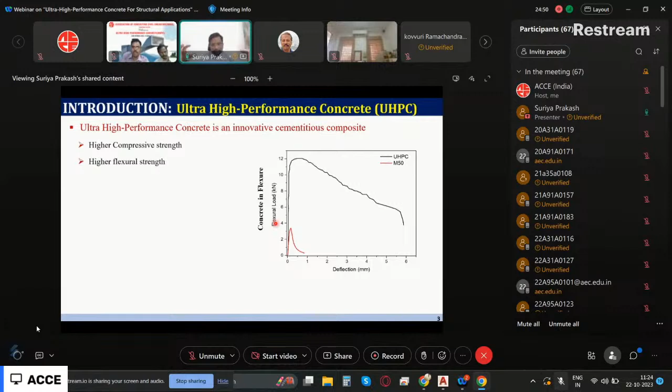Now this is very, very important. This is in flexure. So I take a small concrete prism and then I subject it to 4-point load. If I plot this load versus deflection curve, here again I have two curves. One is the red color one, another one is the black color. The black is the UHPC and red color is the M50. So you see here M50, at even a load of about 3.5 or so, is cracking and failing suddenly. But if you look at UHPC, just as a typical example, this also I can increase. This is in load, not in megapascal. So 3.5 has become almost 12. So it can take very high flexural loads.

And also when it is failing, you can see that suddenly the capacity is dropping in this M50. But here the capacity is dropping very, very slowly, very gradually it is decreasing. So that means this material can sustain high strength in flexure, bending. Also, right after cracking, it will not fail. It will give away its capacity very slowly. That's what we want as a structural element. Soon after it develops a crack, we don't want failure. It should give sufficient warning before we can look at some intervening techniques. Okay, so this is a big advantage.

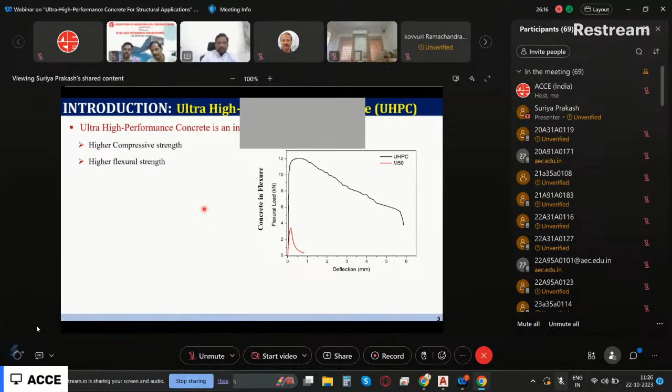And the tensile ductility is greater than 3%. So what is the meaning of tensile ductility? When I test the same material in tension, you know that concrete is very poor in tension. And usually tensile strength is about 10% of the compressive strength. In fact, it varies from 5 to 10%, depending upon what concrete you're looking at. But ductility is the ability of the material to resist the load even after cracking or yielding. For concrete, it is cracking. So even after cracking, it can sustain the load up to 3% of strain. Okay, that's a very high capacity for concrete.

But usually concrete is going to fail at a strain of about 0.0001. Okay, if you multiply in percentage, it is going to be 0.01. So you can see here it is increasing multiple times. Then because I'm having higher compressive strength, higher tensile strength.

Now if I'm comparing a bridge girder like a box section that we have seen here, if I do conventional concrete, these are the dimensions. If I do UHPC, these are the dimensions. People have studied that. Okay, that's the reason a lot of bridges are now being built in India with UHPC. In fact, the Government of India is also pushing this new material to be adopted. You can see the area of concrete. Area reduces by about 50% or so.

The overall depth reduces, so there is a significant weight reduction. The moment I reduce the self weight, when you go for longer spans, if I'm able to reduce the self weight, my demand comes down again. Concrete's major problem is we put a lot of material, and the self weight itself, the dead load, is quite heavy. That's one of the problems with concrete construction compared to steel. Steel is very attractive because it's lightweight. By using this kind of material, we can get into the realm of steel, you can make very light sections. That is a big advantage.

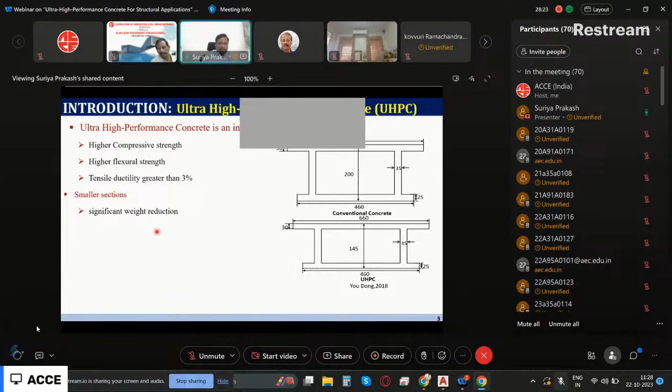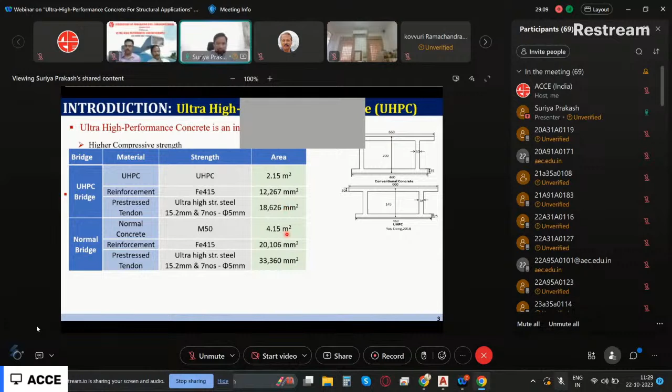This is an example for a bridge superstructure element like a box girder segment. If I'm using UHPC and a normal bridge with M50 concrete, I need a cross-section area of about 4.15 meters square. Here, it's 2.15 meters square, so roughly 50% reduction. Similarly, for the amount of steel, prestressed tendon and reinforcement, you get roughly 30,000 mm square of steel here, but for a normal bridge you end up with almost 50,000. So there's a tremendous reduction in amount of steel too. I use less material and less steel, that's a big advantage.

Most of you must have seen Hyderabad Metro, right? If you look at it in the city area, usually these bridge piers are spaced at about 25 to 30 meters. Metro runs for multiple phases now, and each phase can be 40 kilometers. So in each 40 kilometers, if every span is roughly 30 meters, look at the number of piers required.

Sir, excuse me, for a small observation, there is a gray box on your screen. It's some obstruction. Thank you. Is it okay now? Right, yeah.

If you look at the Hyderabad metro, the number of bridge piers required is one every 30 meters, and then you put the superstructure on it. So you end up putting a lot of material, and also imagine digging up for foundations. If somehow I can reduce the number of column spans and make the span from 30 meters to 60 meters, you're definitely cutting down the number of piers and foundations required, leading to faster construction, and you have a longer clear spacing so people can move across from one side to another very easily. These are all big advantages.

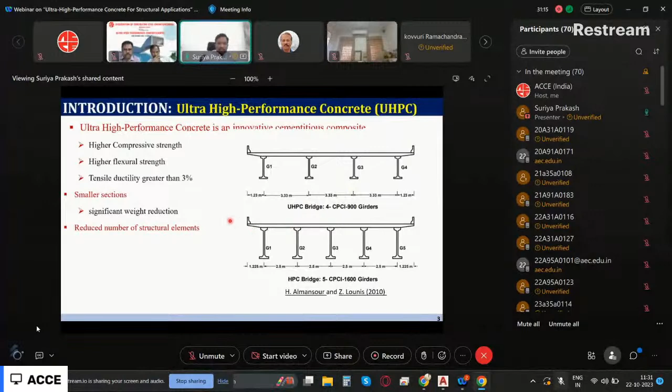Same for the superstructure: instead of high performance concrete, with normal concrete I need to put a spacing of 2.5 meters here, but with this material I can go for 3.3 meters. So even the number of girders required changes, in the normal case you see 5 girders are required and the depth is also high, but here I need only 4 girders for the same carriageway width. So I end up with fewer structural elements. That's what we talked about in the example of Hyderabad metro as well.

Now, another important thing is because we use very fine material, when cement reacts with water and the aggregates, you form hydration products, calcium silicate hydrates, which give strength to the concrete. In regular concrete, the weak link is what we call the interfacial transition zone, the interface between the aggregate and the cement paste. Because I'm using very fine material in this UHPC, this fine material can go into the aggregate and form a very homogeneous surface at the interface. So you get a very dense hydration product and a dense microstructure, and even porosity is going to be less and discontinuous. Durability is related to the porosity and the interconnectivity of the pores; if the pores are interconnected, water, oxygen, chloride, or any substance causing corrosion can flow from one side to another.

If I'm able to make this pore structure discontinuous, then I make the concrete very durable. So this is the advantage - it gives excellent protection against corrosion, excellent resistance to chloride penetration, and low water absorption. These are all the advantages.

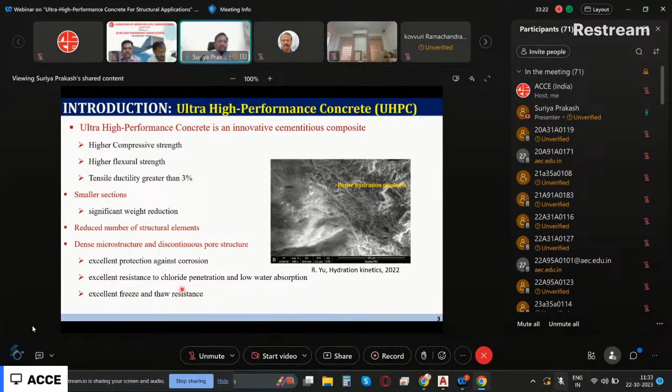It also gives excellent freeze and thaw resistance. Freeze and thaw is not a big issue in India, but in the Northeast, sometimes the temperature can go sub-zero degrees centigrade. If water gets inside and becomes ice, the volume increases, putting pressure on the surrounding concrete and causing a lot of cracking. Now, if water cannot enter, I don't need to worry too much about freeze and thaw resistance. So these are advantages.

Another example: it has high durability and mechanical strength comparable to steel. With steel, you end up with a lightweight structure and can go for a long span. Concrete has its own advantage too - you can make it into any shape you want, and it is highly durable. Fire resistance is a big advantage as well.

By making this material have high mechanical properties and addressing the shortcomings of regular concrete - since steel is prone to corrosion and has fire resistance issues - what we are saying is we take the advantages of steel while also retaining the advantages of concrete. In this way it becomes a fantastic technique for making structures.

If you look at the maximum span: using conventional concrete, I can go for 20 meters. Using steel, I can go up to 50 meters - just one example. With UHPC, you can go even longer because now I can also add pre-stress. So these are some of the advantages, and you can make very complex structural shapes.

That's why facade elements are now being made using UHPC. You can make a very thin, nice facade element that is always in contact with water and the external environment. So that is again a big advantage.

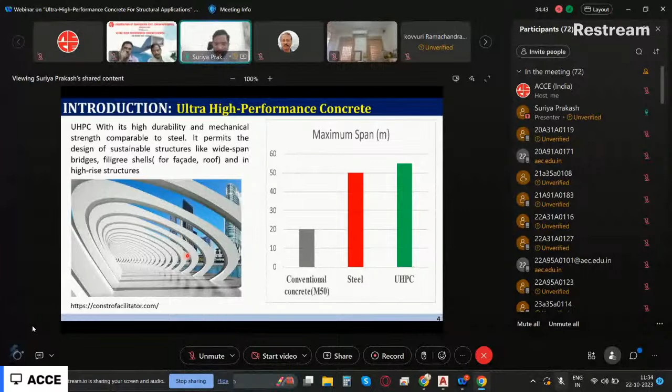Another important reason we are going for high strength concrete is we want to go taller and taller in the building sector, and also make bridges longer and longer. Suspension bridges - people are now talking about 1 kilometer, 1.5 kilometer, even 2 kilometer spans.

If you look at Chicago Water Tower, they used M100 concrete, constructed in 1990, with a height of more than 300 meters. In Hyderabad too, after Mumbai, India is going to have a lot more skyscrapers, with many projects already started in the range of 250 to 300 meters, especially in the financial district, Kokapet area, where a lot of players are putting up very tall buildings.

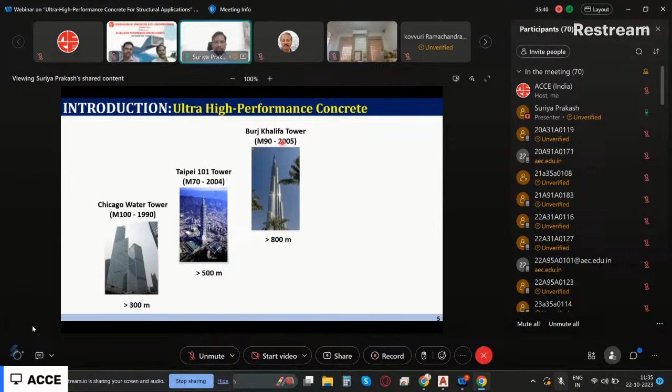Taipei 101 tower used M70 concrete. Burj Khalifa used M90. And now Jeddah Tower, also called the Kingdom Tower, where work was stalled and has now restarted, is aspiring to go more than 1 kilometer.

As the height of the building increases, you want to put a very stiff element - that's why the core is always made of concrete. With high performance concrete, I can use less area and still achieve what I want. This is the reason people are preferring more high strength concrete.

Now let's see historical classifications. For normal concrete, the strength is in the range of 25, 30, 40 megapascals, and water cement ratios are in the range of 0.4 to sometimes even 0.7 in the olden days, because chemical admixtures were not available then. The only way to get workable concrete was by increasing the water to binder ratio - binder being the common terminology for cementitious material.

Then high strength concrete was developed around 1985. People realized that the more water you put, the strength comes down, because you don't really need that much water for complete hydration. So they started looking at water-binder ratios in the range of 0.28 to 0.4.

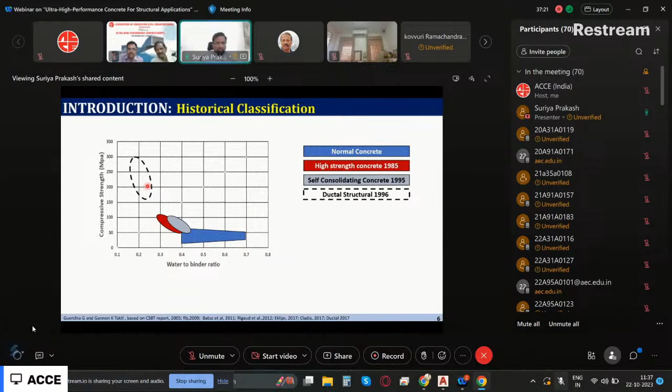And then self-consolidating concrete was developed in around the mid 1990s. And that is again water cement ratios in the range of 0.3 to 0.4. Now, Ductal is one of the first products in UHPC that was developed. They realized that you don't really need that much water to binder ratio, even with 0.18 you can get, and they were able to develop strength in the range of even 300 megapascal.

And then the ultra high strength concrete came into the picture at about 2000 or so. It was developed in France, and then very significantly used in Europe. Then the US also started adopting, I would say, about 20 years ago. And now every state highway department in the US is adopting this in bridge construction. There are also several buildings that are being made with this UHPC.

Now, Taktl is another product which was developed in 2010. That is in the range of 100 because this is mostly for architectural concrete. And then we have again architectural Ductal. One more product came in 2012. That also had a slightly higher water cement ratio because these elements are very thin and so on.

So what I'm trying to say here is if you want a high compressive strength value, you need to somehow limit your water to binder ratio. Okay. So if you want strength in the range of 150 to 200, your water to binder ratio cannot go more than 0.2. Okay. So that is the point I'm trying to make.

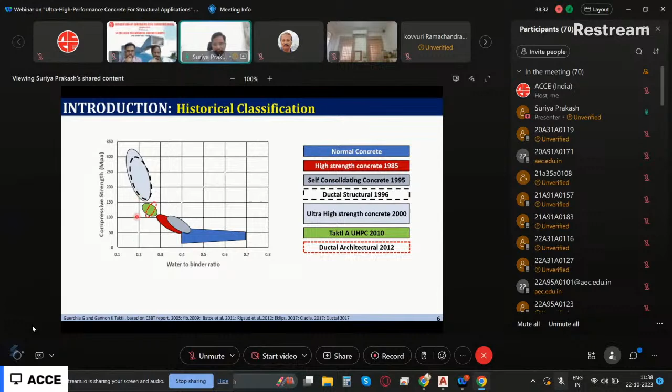Now, in terms of difference in concrete compositions, when you look at it, for normal concrete, the quality of raw material, if I'm plotting it in the y-axis, and in the x-axis I'm plotting different concrete, the quality of raw material for UHPC has to be very, very high. Okay. Even a small change in the quality of the raw materials matters. Even when you want to make good concrete, obviously the quality of your ingredients should be good. But UHPC is a very special concrete. If you want to achieve whatever we are aspiring for, then you have to select carefully, and the quality of raw material has to be really good. Okay, which we will talk about.

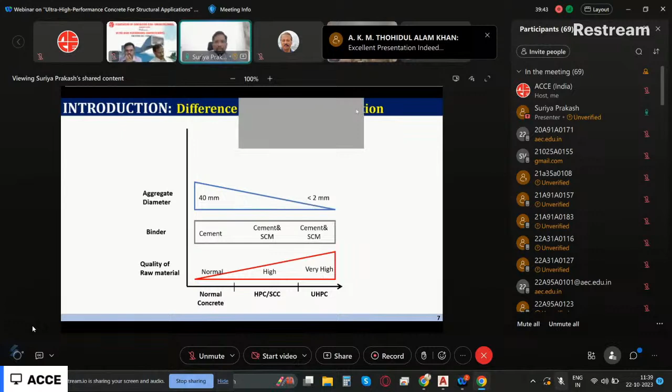And binder, when you talk about it, in normal concrete we use only cement as a binder. In high performance concrete and SCC, we use cement as well as supplementary cementitious materials as binder. In UHPC also, we do the same, cement and supplementary cementitious materials. And in the supplementary cementitious material, again, we have to limit the size of the material. And if you look at aggregate diameters, for normal concrete, usually about 40 mm, but sometimes with proper gradation, we can also go ahead and use low strength, large size aggregates. But in UHPC, the size of the aggregate has to be limited to less than 2 mm. Okay, so then only can I get better packing and good mechanical properties. So these are some of the challenges that we need to be careful of.

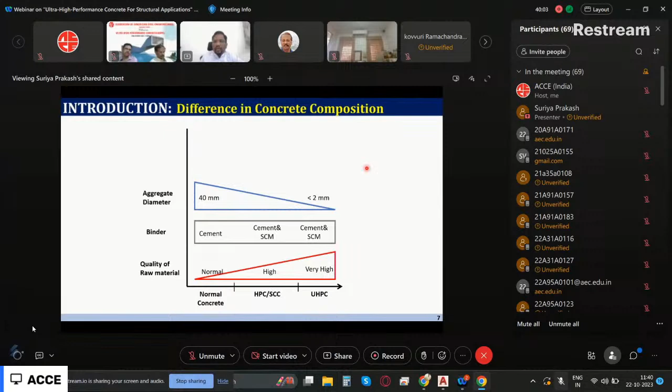Okay, then fibers. Okay, this is another. I said fiber reinforced concrete is also one of the important things that we are going to add. So fibers we don't add in normal concrete, but in UHPC we try to add in the range of about 160 to 180 kg per cubic meter. A very large amount of fiber dosage we add. Okay, so that is another thing.

Now let's look at the flexural performance. Okay, why am I interested in flexure? In superstructural elements, always, if you go to a building or anywhere, we want a large column-free space, right? We don't want to have columns right in the middle. Okay. So if I can get rid of the columns and make the span longer, then the utilization of it becomes much more attractive, right? So that is governed by how the material is going to behave in bending or in flexure.

Okay. So if I start plotting, let's say I cast a 200 mm by 200 mm beam and make it to a length of, let's say, 1.5 meter, and then I put it in a universal testing machine and test it. You'll find the normal concrete will immediately crack, and it doesn't have any reinforcement. It'll fail like this. But if I have fiber reinforced self-consolidating concrete, fibers will increase your cracking load marginally. But even after cracking, it will not let it fall very suddenly. So you'll have a gradual fall like this. We call that a strain softening behavior, because the load is not increasing after cracking. Okay? And in UHP FRC, again, you will have a very high cracking load.

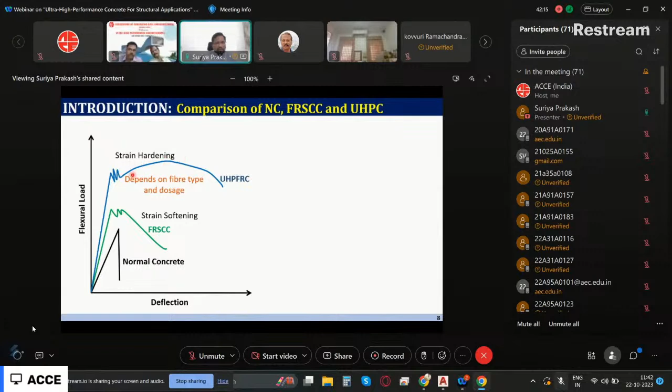And then after cracking, the material will not drop in its capacity, or it will drop in its capacity very slowly. So again, we call this UHP FRC, ultra high performance fiber reinforced concrete. Now whether this drop is going to be flat or very steep depends upon how much fiber you are adding and what type of fiber you are adding. So I can make it really high strain hardening or less strain softening also.

And then after a certain point of time, if the length of the fiber is very short, the fiber can pull out also. In fact, it is through the pull out mechanism that a lot of the energy absorption in the cracking process is achieved. Then finally, if the anchorage is very good, when the crack width is becoming more, the fiber can actually fracture. This is what we call fiber fracture or fiber failure. Fiber can also completely pull out. It depends upon multiple factors. So these are some of the challenges. This is the way the energy absorption mechanism due to fiber reinforced concrete arresting the crack happens.

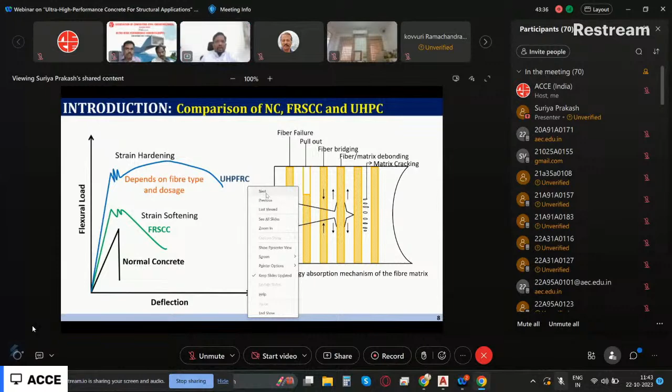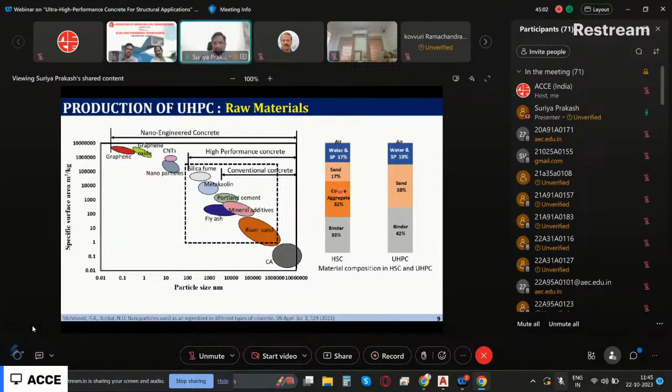Okay. So now in your UHPC, if you look at your mix composition or material composition, for a high strength concrete, your binder system, cement and supplementary cementitious materials, occupies about 33% of volume. Coarse aggregate is about 32%. Sand is about 17%. Water and superplasticizer is about 17%. But in UHPC, the binder obviously will increase. But you see that there is no coarse aggregate at all. Coarse aggregate becomes zero, and we use only fine aggregate, and that is about 38%.

And in fact, with this regime, particle size ranges from about 20 to 30 nanometer to almost up to 1 millimeter. This is the range our particle sizes are going to be in ultra high performance concrete. We are going to use a lot of silica fume, a lot of cementitious system, Portland cement, fly ash, and then we can also use GGBS and so on. Okay, so there is no coarse aggregate in UHPC.

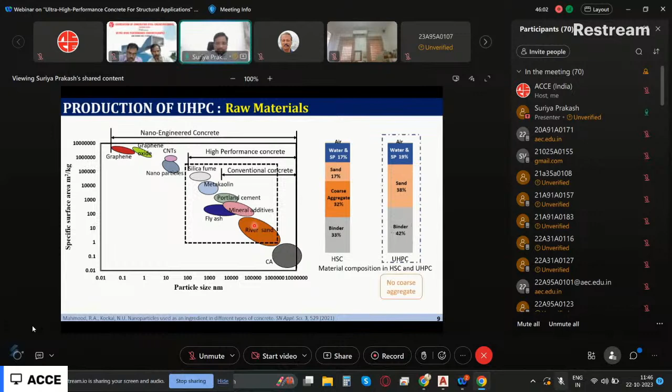For normal concrete, the packing density is about 0.6. But what we are trying to get in UHPC is, by limiting the size of the particle, we are trying to pack all small particles of different sizes so that I can reduce the void spaces inside the cross section. So by combining particles of different sizes, and also limiting the maximum size.

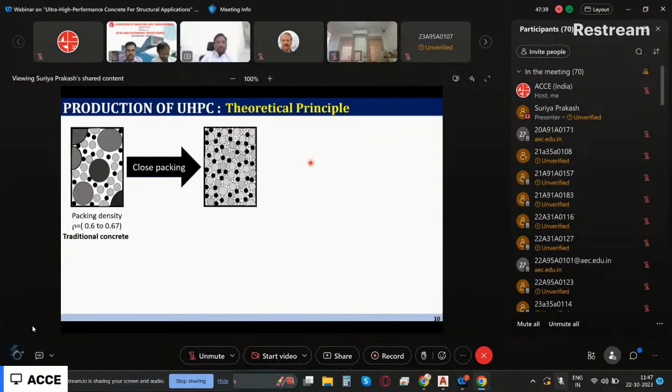For example, you don't see these gray color big particles. The maximum is the fine aggregate. These are all fine aggregates. And then you have silica fume, and then fly ash, and so on, and cementitious material. So I can get a packing density as high as 0.85, 0.9 also.

So what does it do? It helps in reducing porosity, improves microstructure, and enhances the homogeneity of the concrete.

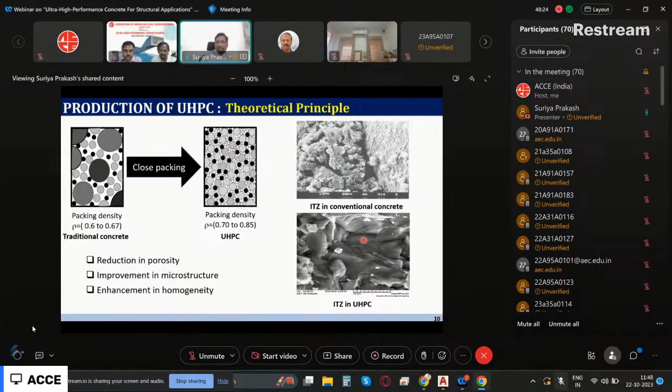So that means this is a weak link. The crack will originate here when you load the concrete. But if I remove this weak link, then the mechanical performance of the concrete is going to be much better. Now, we know that when you reduce the water to cement ratio, water to binder ratio, I can reduce the porosity and strength will go up. That's what we are trying to do in ultra high performance concrete.

But what is the cost that we pay? When I reduce the water, workability also reduces. So how do we compensate for that reduced workability? I have to add high range water reducer or super plasticizers. And the super plasticizers should also be compatible with the type of cement and type of material that we are using. In that way, we can improve the workability.

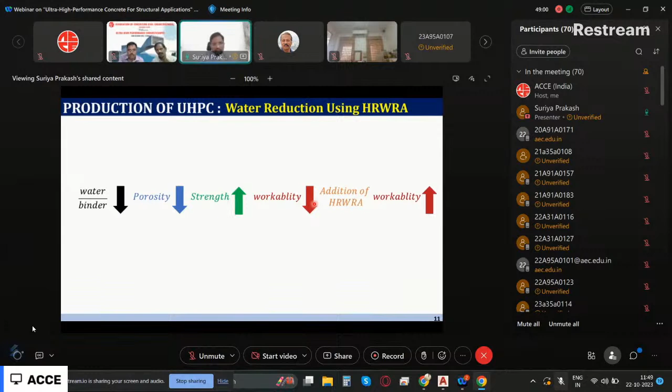So this is the idea. Now let's see how the mix design is done. A rational binder design or mix design is based on the characteristics - I first have to target what is the optimum packing I can achieve from the size of the material, and how reactive all these materials are. I also need to retain this self-compacting flow so that it can flow on its own. And we need to consider what aggregate class and quantity is required based on the packing density that I'm trying to achieve.

Now, how do we evaluate the material properties of all the raw materials? Of course, we need to do mechanical testing - compression, tension, flexure, fracture. And since this is a highly durable concrete, it should also satisfy some durability performance - chloride penetration, resistance to freezing and thawing, and so on.

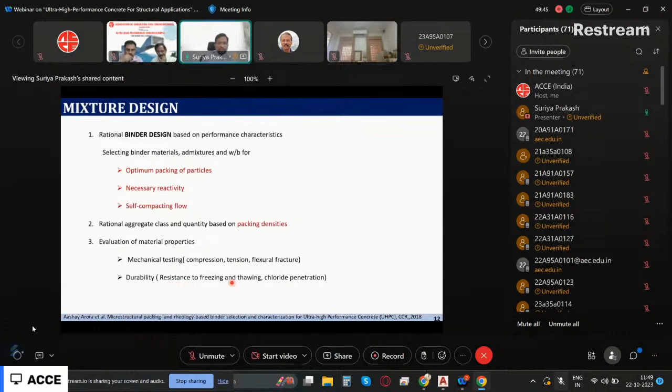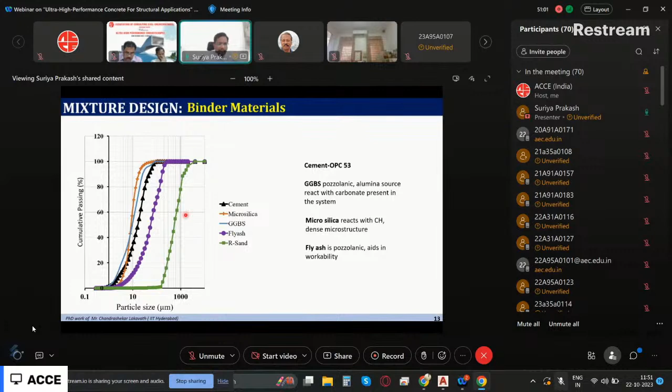Okay, so that's what we do.

Okay, so we select the binder materials, and then first we do the optimization of the paste, without any fine aggregate. So first we optimize the binder combinations for paste. That means how much should be cement, how much should be GGBS, how much should be silica fume, how much should be fly ash. I make a paste out of it and then evaluate the mechanical properties and flow characteristics and packing densities.

Then once we optimize that, we go ahead and put sand gradation, and then we add fiber volume. Then we find out the preliminary water to binder ratio, and what superplasticizer is required. And once we do that, now we are adding sand as well as fiber. Along with that, we need to evaluate the flow, and the flow should be greater than 220 or 250 mm. Then once we achieve the flow and these proper properties, you evaluate the hardened properties.

The hardened property for UHPC is that it should have at least 120 megapascal. Now, if you're designing for 200 megapascal, then obviously you have to do the optimization again. Then finally, if the strength is as per your requirement, and your flow is as per your requirement, then we can go ahead and finalize the mix design. So this is the procedure that is given here, and this is what we do.

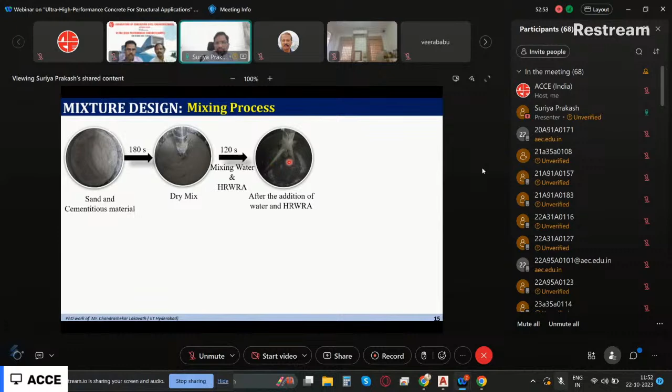Okay, so now how do we do it? First, in our case, the sand and cementitious materials are combined, and we do dry mixing for about 3 minutes. And then we add a little bit of water and high range water reducer, and mix it for another 2 minutes. Once you add all these things, you see slowly it will form like a fluid. Then we also add a little bit of polypropylene fiber.

These are microfibers just for arresting the shrinkage, because in UHPC we use a very high amount of cement content, in the range of 800 kg per cubic meter. So when you use such a cementitious content, shrinkage cracking can be an issue. So we add a very small dosage of polypropylene fiber. Then again we mix it for 60 to 120 seconds, and then we finally add the steel fibers. Then again we mix it for about 2 minutes.

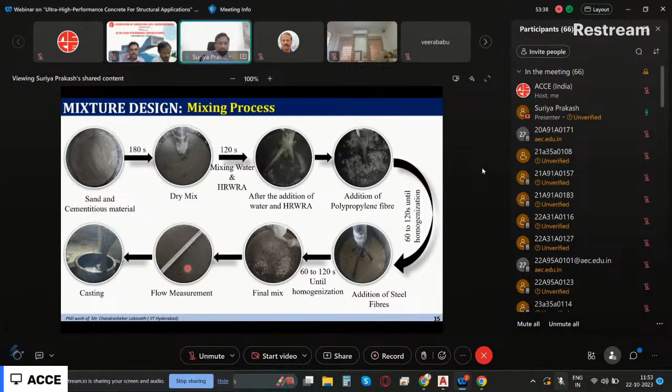Then you see that finally you get this kind of a mix, and then we check the flow. This is the minimum mini slump flow test, and once it meets the minimum requirement, then we go ahead and do the casting. Okay, now let's briefly talk about structural applications.

Now we talked about the mix design and how this UHPC material is actually realized. You see this material has been in use for about the last 20 years or so. If you see the Paris Museum, they've used this product Ductal, which is a UHPC. Similarly, look at this facade element. Very nice, intricate shapes can be made because it's a very highly flowable concrete. Even without any reinforcement, it will be able to take a lot of load. So that is the reason people have been using this material for facade elements, and footbridges.

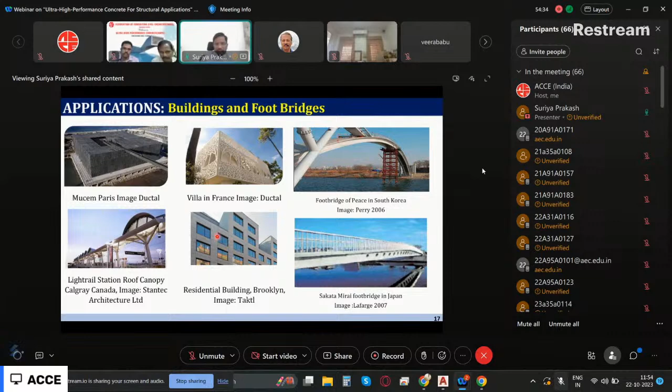Very long footbridges or bridges can be constructed. And this is a light rail station roof canopy. It looks just like steel, but actually it is all concrete. Residential construction also, we can make facade elements and structural elements using this. So these are some of the applications.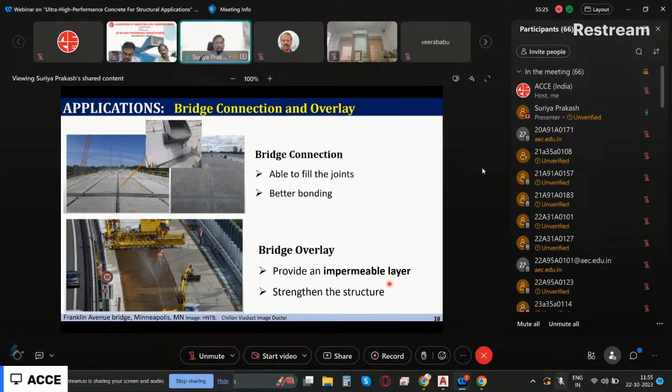And bridge overlay application. What is an overlay? We put a small top layer on the bridge surface. This provides an impermeable layer because UHPC is a very dense concrete. It will not let water get inside, and it can also be used to strengthen the bridges. And bridge girders are also done. This is one pi girder, which was done in Iowa, one of the bridges in Iowa. Iowa is a state in the US. And this is one of the bridges that was recently done in Masalga of Latur, in the place called Latur in Maharashtra.

They use this U-shaped, trough-shaped UHPC girder, almost 111 meters in span. Look at the old bridge with many spans, every 20 meters you have a big pier connected. Now you see how many piers were eliminated just by increasing the span to 111 meters. So you see the amount of material saved. Though this material is higher in cost, we reduced foundation cost, reduced the number of structural elements, giving a tremendous advantage, and the material is also highly durable. These are the advantages of using UHPC.

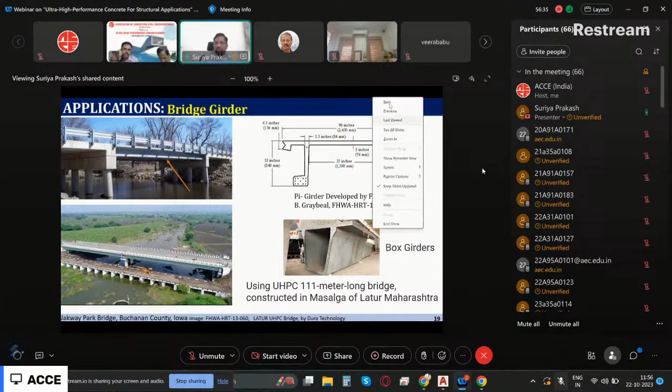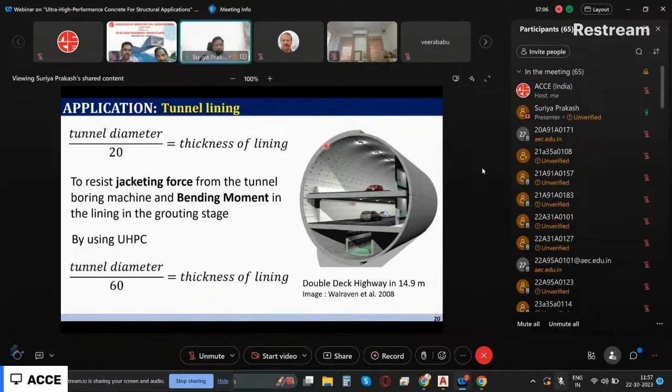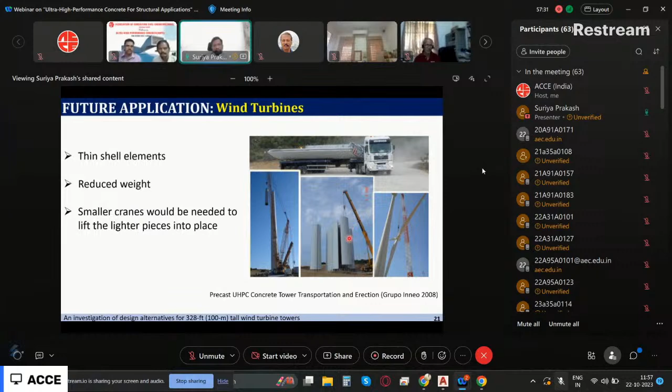Wind turbines are usually made using fiber reinforced polymer material, but now such systems are also made using UHPC. So you end up with a very thin shell element. I can go for a longer height, reduced weight, and very small cranes will be needed to lift and place it. You can make it all using precast and connect them together.

Now let's see the challenges. We need a very low water to binder ratio to attain strength more than 150 megapascal, and we need it to be self-compacting for bridge deck connections or other things. So when you want it self-compacting, you need to put in a lot of admixtures, and the setting time is going to increase, so the mix will not set.

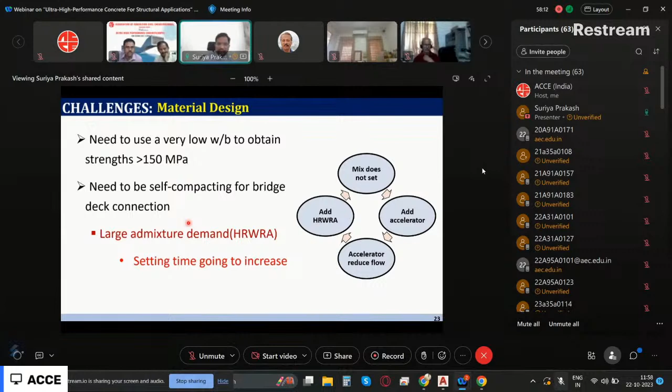So what do we do to address the setting time? We add an accelerator, usually calcium chloride or calcium nitrate. But the accelerator will then reduce the flow, so it's a cyclical process. You have to do a lot of trials before you get it right. And cost also goes up, because when you put in large amounts of admixtures, the cost of the concrete increases.

We also need to use several types of fine powders, extremely fine powder to ensure particle packing and reactivity. What are the different types? Fly ash, GGBS, microsilica - all of them have to be readily available, and for constructing a bridge, the material should be adopted locally.

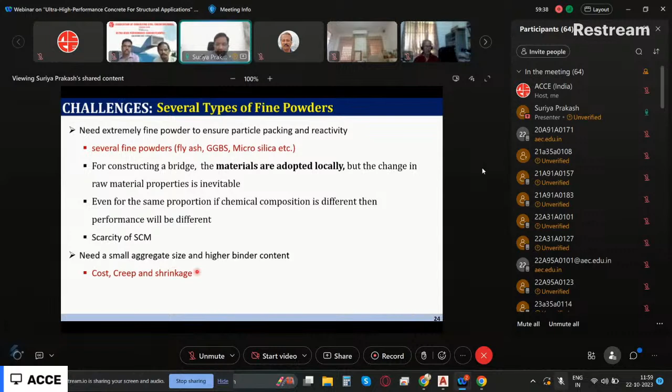How long we'll continue to use thermal power plants and get fly ash from there is not known, because people are developing alternate power sources too. Currently thermal power plant is still a major power generation source, but how long that will continue we don't know, so scarcity of SCM is one of the issues. We also need a very small aggregate size and higher binder content, which increases cost. And the moment you reduce aggregate size and quantity, creep and shrinkage issues also become higher. These are some of the challenges.

Then again, fibers - when you do a regular casting at a large scale, you cannot really guarantee the orientation of the fiber. If the fiber is perpendicular to the crack - say this is a beam we're testing with a notch - if fibers are perpendicular to the notch, it arrests the crack better. That's why flexural performance is much better for a 90-degree orientation. If the fiber is parallel to the crack, it won't do anything.

Okay, so this is the notch. Notch is in the vertical direction, and fiber is also in the vertical direction. The crack will not be arrested by the fiber. So ensuring proper orientation of the fiber is also a big challenge. This is another one of the issues.

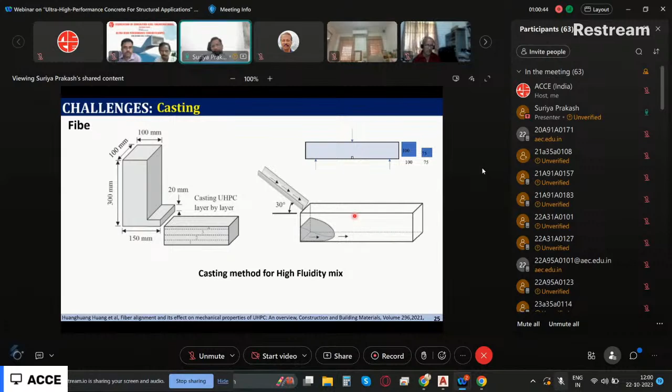Now, what we can do is a casting method for highly fluid mixes. This kind of trough at 30 degrees, we can cast and let the concrete flow from one side to another. In this way, in a beam kind of element, we can make sure that the majority of fibers are oriented in the horizontal direction, which helps in arresting the crack.

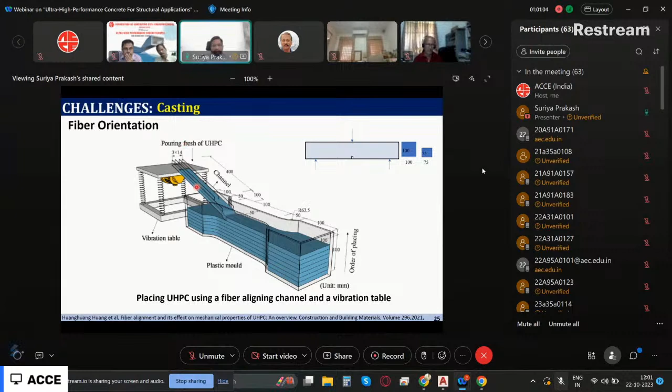Okay, these are some of the challenges. Again, for fiber orientation, this kind of channel system can be adopted in a precast environment. But in regular cast-in-place construction, this kind of mechanism is very difficult to achieve. So these are some of the challenges for making sure the fibers are oriented in the direction we want.

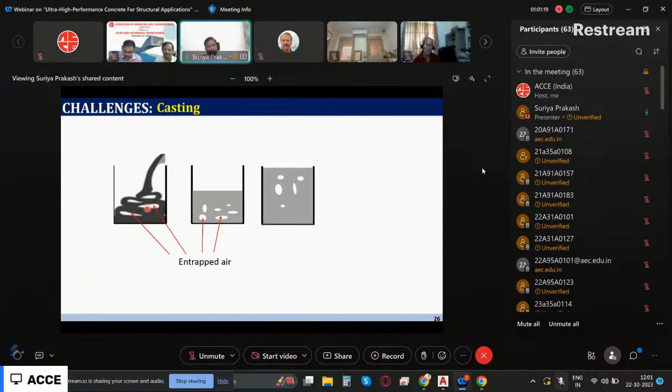Now, during casting, you can entrap air. Even though it is self-consolidating concrete, you can have trapped air. And with vibration, these voids will come to the surface, and usually that's the reason the top surface will always have less strength compared to the internal concrete. So there's a reduction in strength, and the failure pattern also changes.

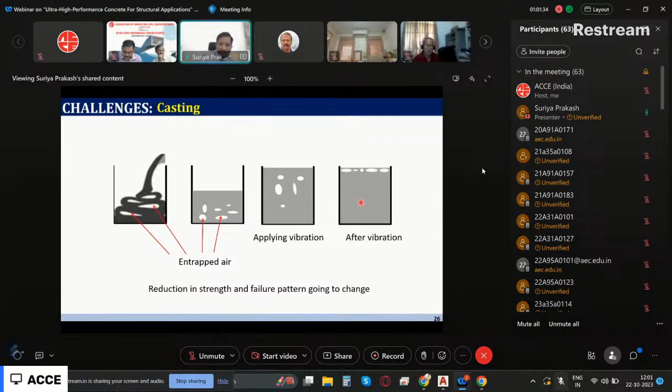Now, what happens is, sometimes with a normal mixer, the mixture requires attention. In fact, for UHPC to ensure proper performance, we use a twin shaft mixer, which is a specially designed, high-speed shear mixer. You cannot use a regular drum mixer or pan mixer. You can use it, but then your mixing time will become longer.

Then what can happen is you can overload the mixing engine. So the mixer engine can be overloaded, and this is a limitation. Mixing torque required for UHPC will be very high, whereas for conventional concrete you don't need that much. So current existing mixers have to be modified slightly, or we need to do it in low dosages and cast in multiple batches.

So why is high-speed torque required? It comes from the mixing kinetics. There are different processes that happen. One is wetting and nucleation: first, the water or admixture we are adding gets absorbed into the granules. Then there's a process called consolidation and growth, which starts only after all the granules become wet.

Now, since we are using a low water-to-binder ratio, water from the wet surface gets squeezed from the inside of the granule. These are the different processes involved. Then finally you have homogenization, and to get homogenization, I need a large mix time. So if you use a regular mixer, the mixing time increases a lot because of the low water-to-binder ratio.

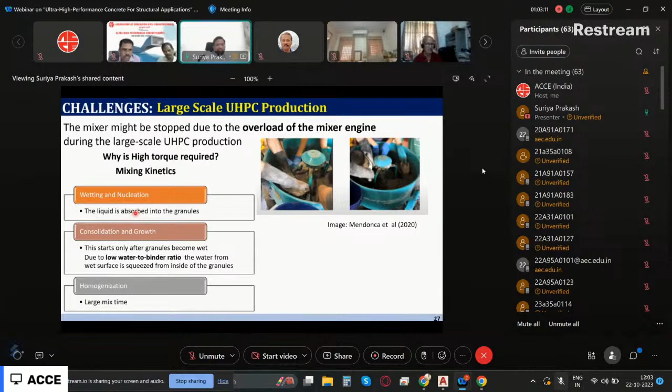First, everything has to be wetted and nucleation has to happen, then consolidation and growth, and finally homogenization, which takes a very long mix time. So for large-scale production, we need a high-speed mixer. Addition of ice cubes reduces the mixing time and temperature and increases the flow. Number of modifications to precast site mixers are required before we can successfully produce UHPC precast elements.

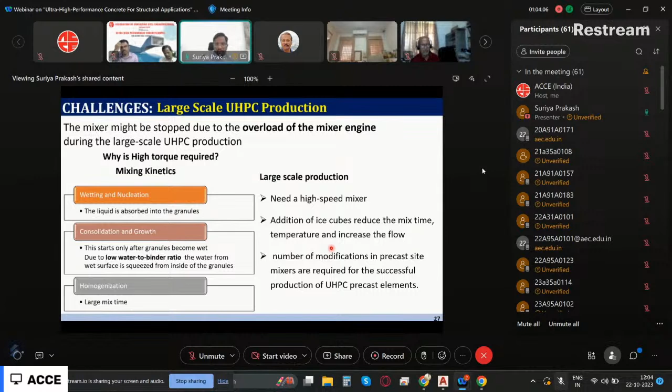UHPC nowadays is traditionally done using precasting. Very few constructions are done cast-in-place, where you get it from your RMC. In fact, we have only two producers in India right now. One is based out of Pune, and the other is Dura, a company with Malaysian technology that has set up a plant in Pune. There's another one in Mumbai, UHPC India. These are the two major players supplying this material, and in fact, they supply it as a pre-packed mix.

In fact, a couple of my students are also now putting up a company; they will be supplying this material as well. Anyway, so this is the implementation, and there are going to be challenges. What are the implementation challenges? In India, for anything to be implemented, we need codes and specifications, and right now we don't have specifications.

We are, though France, Swiss, US, and Canadian guidelines are there that we can adopt, but Indian guidelines are not there. In fact, I'm part of the BIS, Bureau of Indian Standards, and this committee that we are looking at is developing guidelines. And there is a lack of industry experience with batching, mixing, and how to incorporate steel fibers. Again, these are all challenges.

And high material cost is a major thing. We end up putting a lot of steel fibers, and this is a very special fiber. They are called micro steel fibers. Their diameter is about 0.18 mm and length is only about 13 mm. So I cannot reduce the steel fiber to 0.18 mm just like that.

I have to change the alloy composition. So the cost of the steel fiber that we are using is about 210, 220 rupees per kg. So again, cost is an issue. And we need a lot of good quality supplementary cementitious material, and the admixture quantity is also going to be high.

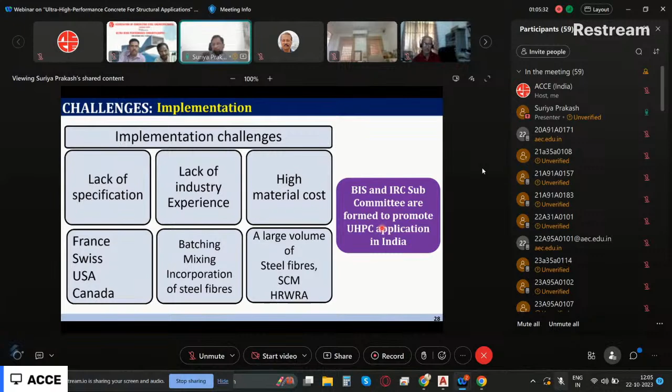Now BIS and IRC subcommittees are formed to promote applications in India. We are coming up with a guideline, and it is in draft stage. Hopefully in another 3-4 months, I think it will come. Now, these are the challenges. Let me briefly talk about the research work that we are doing.

Optimization of mix design that I talked about is also going to play a major role. This is the PhD work of one of my students. You see here, in the first trial we used cement of 890. I'm just giving some numbers, microsilica, and so on. But you see the strength you are getting is only about 40 megapascal, and setting time is more than 40 hours, which is not good. And flow, though, we are achieving.

Then again, what did we do? We reduced that admixture. Then your setting time is less than 24 hours, but the flow is coming less. So then what happens? 53.4 liters became 26.7. Then it became 40. Then I get strength I am not able to meet. So like that, we need to do several trials before we get what we want.

Again, the effect of fly ash. You see, finally we were able to get this mix at about 7 days. We were able to achieve about 110 megapascal, with a lower cement content of about 700 kg per meter cube. So like that, we have to do a lot of trials, and there is a particle packing method. There is an approach called the Andreasen model. If you know the particle size distribution of all the particles, then you can get the combined gradation, and with that, we can get an idea how good your mix design is.

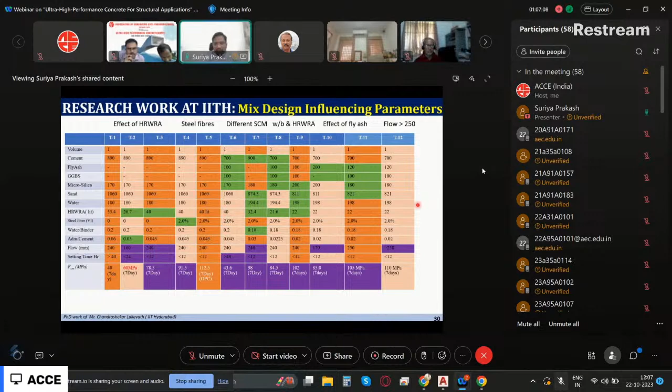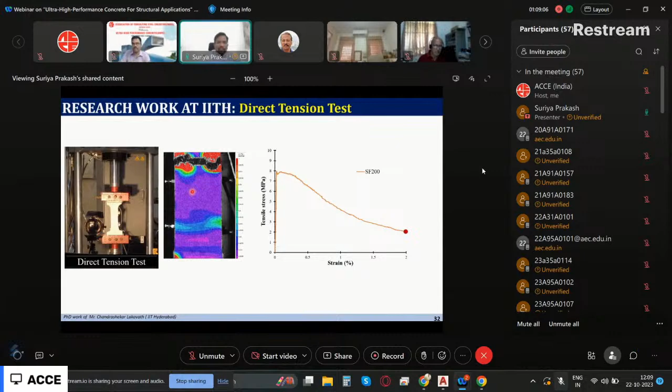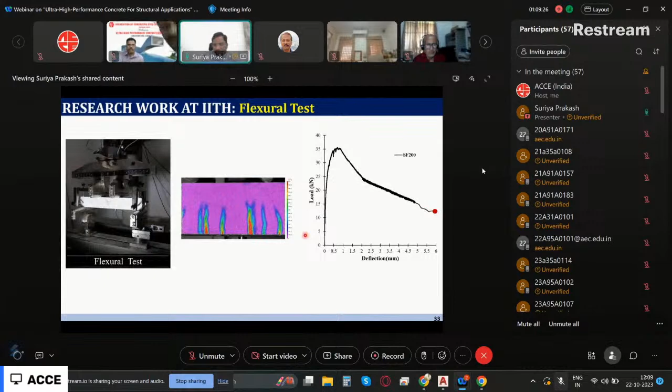And that is the reason we are very confident that this particular technology will work really well. This is the flexural test I mentioned. You can see multiple cracks are formed, not just one. Whenever your system is able to generate a large number of small cracks, that means the performance is good.

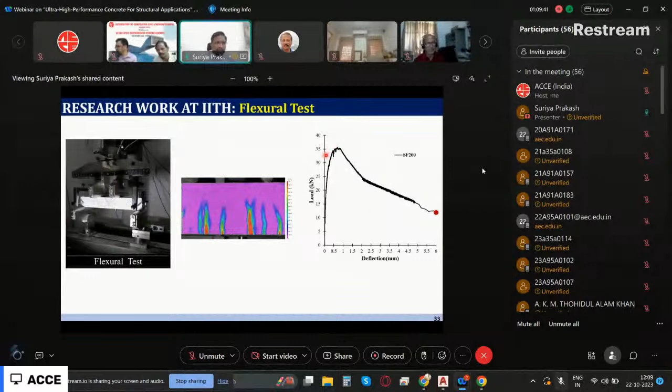So you can see that 35 kilonewton, and this was only about 150 by 150. If you divide by this area, you will get the strength of about 22 megapascal. That is the reason we said we are able to generate this.

Then, from our test, we collected all the data from existing literature and came up with an expression for an elastic modulus. Just like in IS code we have 5,000 square root of FCK, instead we said the elastic modulus can be calculated from 0.85 times 5,000 into square root of FCM, where FCM is your cylinder strength, instead of cube strength. But in UHPC, the difference between cylinder strength and cube compressive strength is not much—cylinder strength is only about 0.95 times the cube strength.

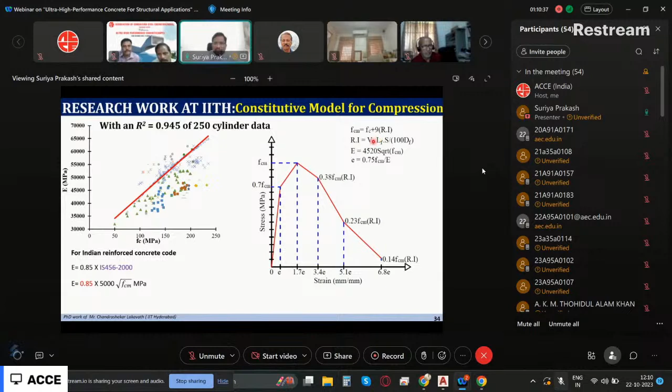Then using all this data, I needed to get some stress strain curve model to be used in design. So we came up with this multilinear stress strain curve that can be used for design. RI is your fiber reinforcing index parameter. If you give the length of the fiber and the volume fraction of the fiber, I can get the stress strain curve equation.

We also came up with a stress strain curve for tension, because in regular reinforced concrete design the major assumption is anything below the neutral axis in flexure, concrete is not going to contribute in tension. But this material gives very high tensile strength, so we cannot ignore that. That is the biggest advantage with this material. So I need to know the stress strain curve of this material in tension.

Again we did a lot of work, collected data from various research papers, and came up with this simple multilinear model. If you give me the compressive strength and fiber details, you can get the stress strain curve that can be used for calculations.

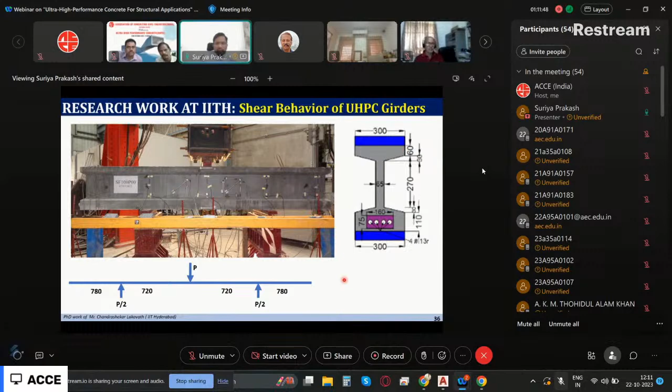Throughout the world we saw the behavior of bridge applications, but how is this system behaving in shear? Because when it fails in shear, it is a very brittle mode of failure. So we tested several bridge girders like this and evaluated the performance. This is one such test—tested in very heavy shear, and you find that even after first cracking at about 550 kilonewton, the system was able to resist a lot of load.

You see here the crack is forming because it was tested in three-point loading, and wherever there is this red color, you can see the crack—that's where it is forming. So we looked at, if I change these fibers, what will happen? And if I change the amount of pre-stress, what will happen? All these things we studied.

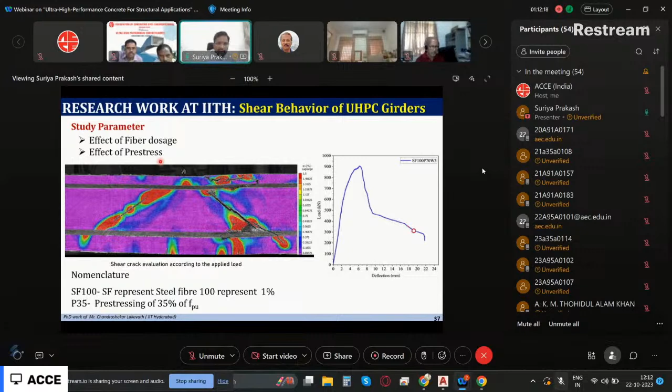We found that the amount of pre-stress helps in increasing the cracking load and helps in increasing the peak load, as expected. Similarly, if I change the fiber dosage, it also helps. For example, if you look at P35 and P70 for the same fiber dosage, increasing the pre-stress helps in improving the performance.

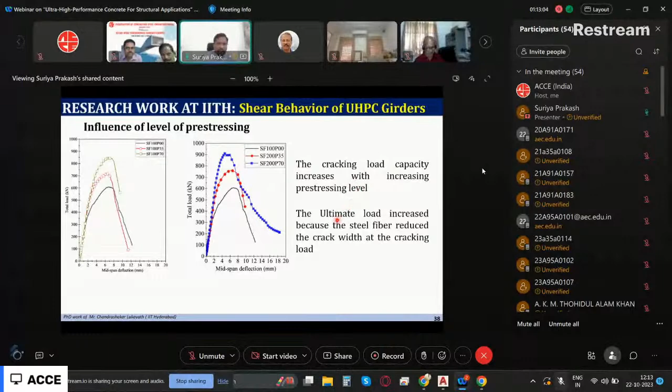This is for 1% fiber dosage. P0 means no pre-stress. If you put 35% pre-stress, you get a performance improvement; 70% means further improvement. So the cracking load is found to increase with the amount of pre-stressing, and the ultimate load also increased. These are different things we have understood from our research.

Now all these things will go as a guideline for what we are developing for IRC and ACCE, and the design guidelines based on this data.

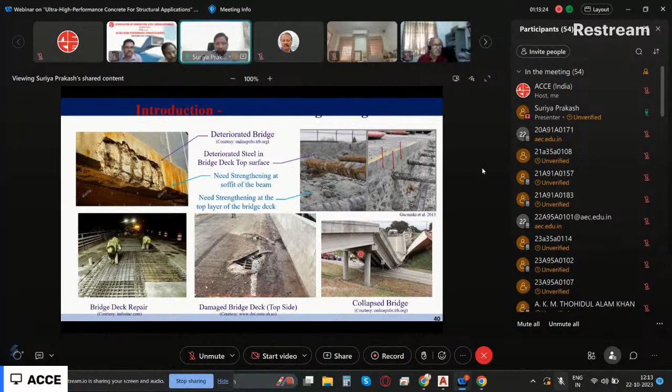This material can also be used for strengthening of beams. So we evaluated, for an existing beam, if I put this kind of overlay—what we do is chip the concrete at the top and put a small layer, about 50 mm or so.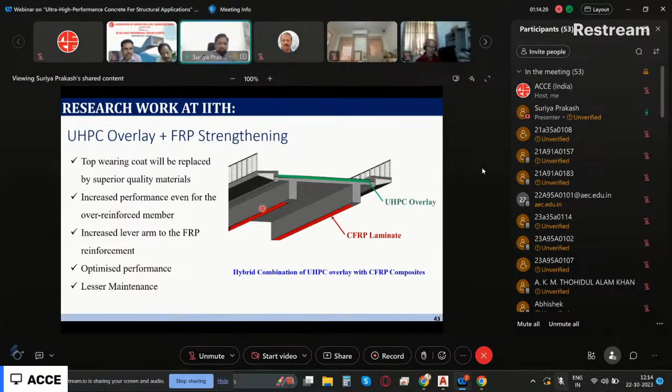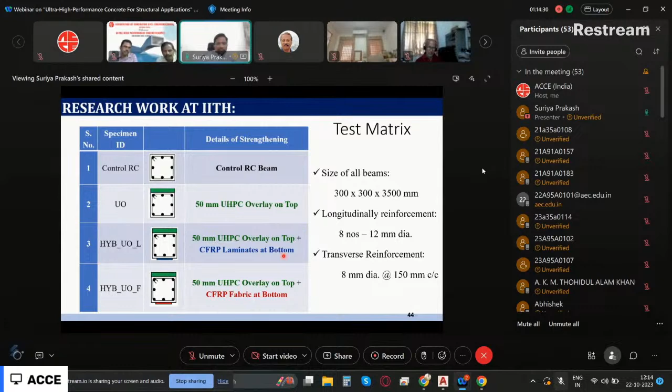And we looked at, okay, for bridges, especially strengthening is an important area. When I combine this UHPC overlay and FRP laminate at the bottom, how the system is going to behave. So that is also, again, we looked at it and we tested several beams, control beams only with overlay, and then we looked at overlay plus FRP. Like that, we played with the different combinations. We found that, and these are some of the details.

Okay? In fact, I can share the PDF copy of this. You can use it. And we found that this UHPC overlay, for example, these are the different techniques, load versus deformation curve. And you can see that the hybrid system with the fabric and overlay, the strength became 100 to almost 230. That means for an existing girder, if I can apply this UHPC overlay plus this FRP strengthening, I can double the capacity. I mean, because you have to do the calculations, and the stiffness also can be improved. So it's a very good strengthening technique also for existing systems. So that is what we have said.

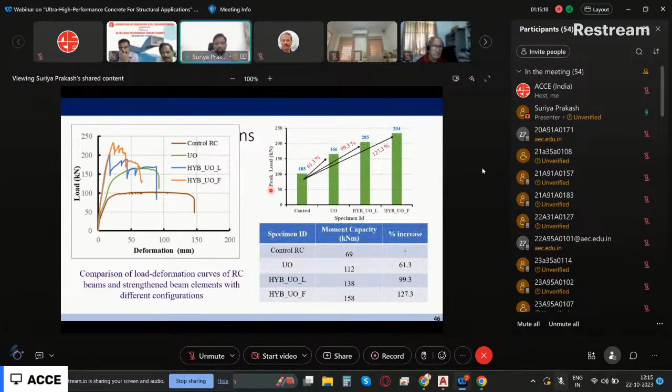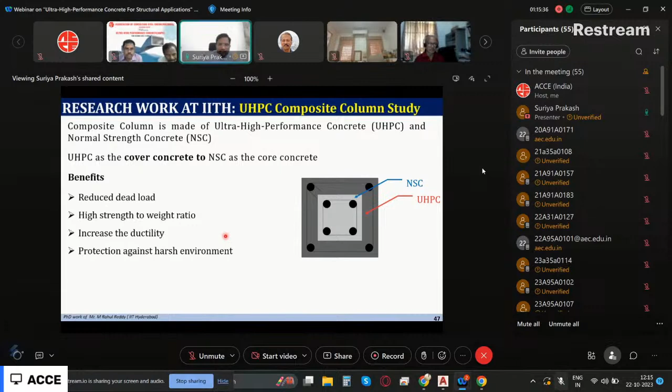Again, we looked at for buildings. Okay, if I want to use this as a column, and this is a costly material, so I put a new normal concrete, and then if I put additional material as an UHPC, this is going to protect this NSC, normal concrete, and we can lead to a composite column. So it leads to reduced dead load, high strength to weight ratio, and it is going to increase the ductility, and it is also going to protect against the harsh environment. So we did. Why did we do that? And also this can be used as a strengthening also.

And we also looked at how the composite column behaves with a normal concrete. So this is a normal concrete column of 300 by 300. You see it is taking only 4,000 kilonewton at a particular displacement. The moment I make it as a composite column, I can increase the capacity from 4,000 to almost 9,000 kilonewton. So now you can see I can either reduce the number of columns or I can go for a longer span of the beam, so that with same cross section I can support more load.

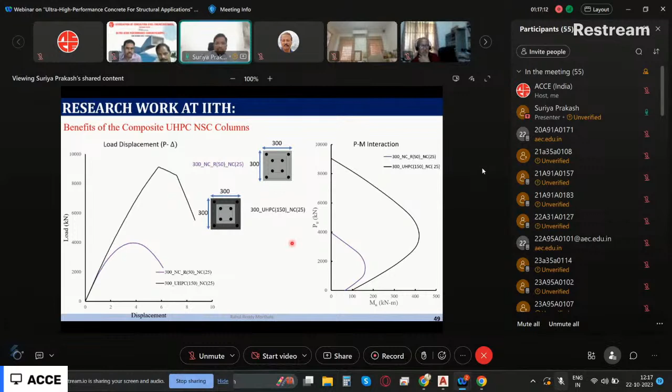And columns are always subjected to not only axial compression, you'll have axial compression and bending also. Again, we did a lot of testing for columns under different combinations of this compression and bending. And this is your famous interaction diagram. I think several of you must have used this SP16 when you're designing. And these kind of design charts can be developed. Now you see here, with this composite column, I'm getting very good performance improvement in compression as well as in bending and all combinations. So with same cross section, now I can support more bending as well as axial compression. So these are all some of the advantages.

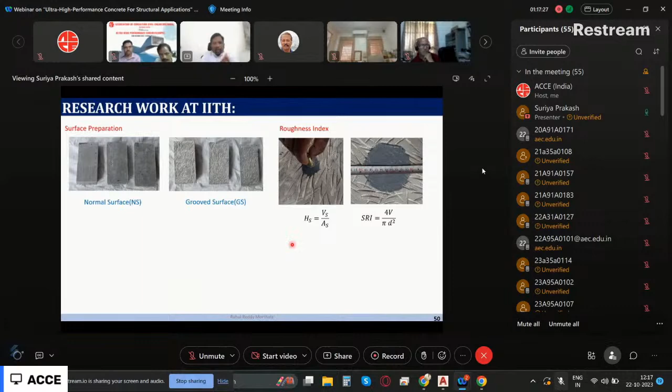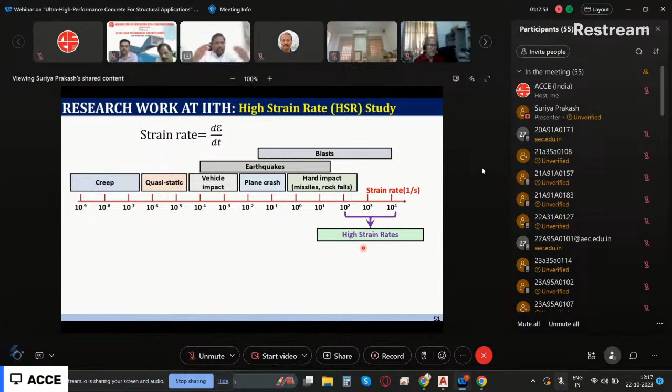Then we also looked at surface preparation, how the surface preparation is going to behave. Because when I'm putting a new UHPC over an existing column, then the bonding between the new concrete and the old concrete has to be good, right? So that is, again, we did a lot of testing. And we also, for Indian Army, we looked at if I use this material and putting it under high strain, it means, let's say your bomb is blasting, or in army structures, we want to store our missiles and all, right? So at that time, to protect our armory from enemy attack, our system should be very rigid, right? And it should not damage. So we looked at all these things, okay? For air-based structures, you can use this UHPC.

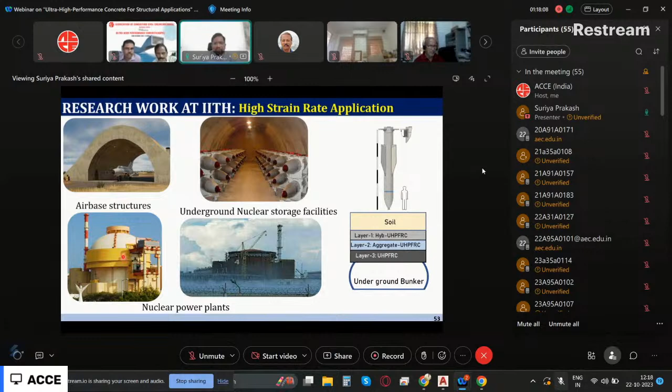And these are underground nuclear storage facilities, nuclear power plants. Your containment structures have to be very, very good, right? So for all these things, this material is going to behave very well. So how do we test whether this material is good or not?

This is one facility that we have created in IIT Hyderabad. This is called the split Hopkinson pressure bar setup, and this can be used to test material. And this is a figure that we are showing.

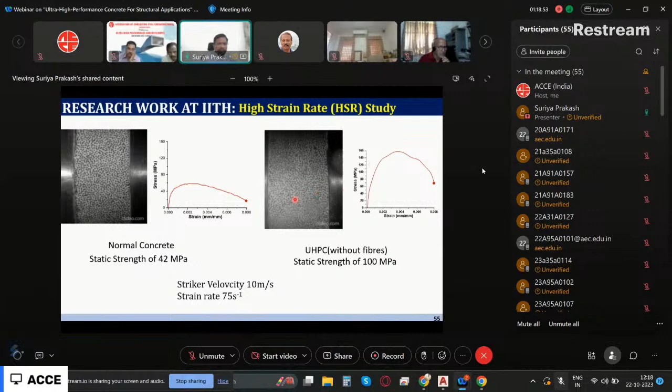Normal concrete fails at a very low strength. But you see, if I test it at the same velocity, UHPC is able to give a strength much higher than that of the normal concrete. We applied a striker velocity of 10 meters per second, corresponding to a strain rate of 75. So you see here the UHPC performed much better than normal concrete. So like that, we can see.

So in summary, what I can say is UHPC has tremendous applications in bridges as well as in buildings, but more so in bridges. UHPCs are more sustainable and durable in harsh environments, and it is a very viable solution for retrofitting existing structures. And again, UHPC composite columns have great potential in buildings, and proper mix design care should be taken for large scale production. So this is a new material, new technology.

So your mix design has to be done very, very carefully. And especially, at lab scale everything will work well. But when you're implementing it in large scale construction, you have to do a lot of trials and ensure that quality control is properly maintained.

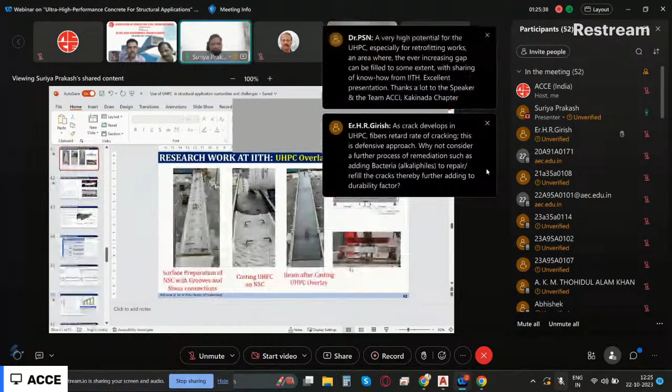Okay, so here you can see this test, what we have done. We failed just slightly at the interface, but that happened. That is also minor, that horizontal crack we developed. But finally, things are okay.

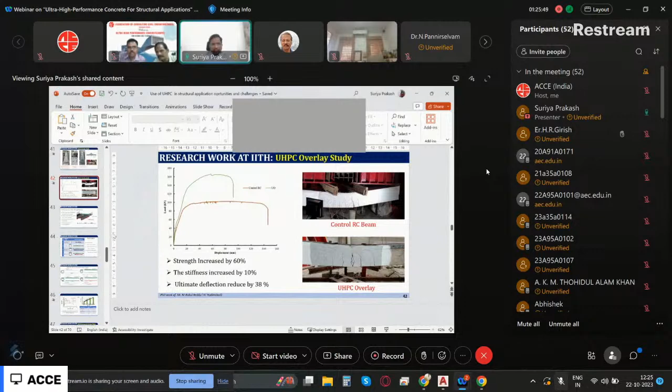I don't know whether I have the failure modes of the other specimens. Because of time limitation, I did not include that. But in our cases, delamination was not observed. But again, you have to be careful. In ACI, when you are using this, there is a provision for calculating your debonding strain that we need to make sure is not exceeded.

Okay, sir. Thank you, sir. Thank you, sir. Thank you. Thank you. Yes, sir, I have a few questions, sir.

In this concrete, you mentioned that cement, microsilica, GGBS, fly ash, and sand are the ingredients. Here, the sand is only the coarse aggregate, sir. You mentioned that coarse aggregate percentage is 32%.

Yeah, that's typical, I just gave an example. Again, if I'm developing a 200 megapascal or 250 megapascal mix, the proportions will slightly change. But in general, there is no coarse aggregate, and the aggregate sizes are usually limited to 2 mm. If I go for a larger size aggregate, I cannot get that packing, so that is the reason we are limiting the maximum size.

So the whole idea is, in a particular volume, I want to pack as much material as possible. That is possible only if I am limiting the size of the aggregate. That is the reason we limit it to 2 mm. But now people are also using some 5 mm, 6 mm aggregate. There you have to really tweak and make sure you are achieving the packing you want. But typically in UHPC, the size of the aggregates is less than 2 mm.